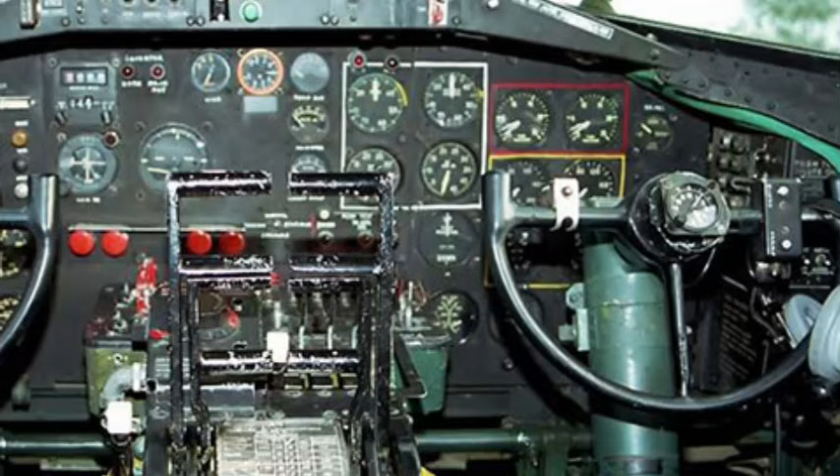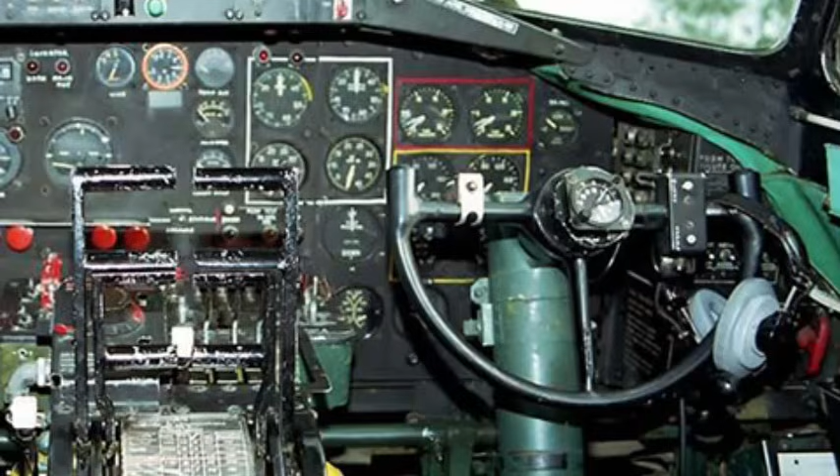Nobody who flew bombers in the 8th Air Force in 1944 thought about the bearings. They thought about flak. They thought about Focke-Wulfs. They thought about the cold and the fear and the fuel and whether the navigator had the wind right. They thought about 1,000 things, but never about the 4 small curved pieces of steel-backed silver alloy that were the only object standing between their aircraft and a runaway connecting rod explosively dismembering their engine in the thin air over Saxony. This is the story of why they didn't have to.

Every modern aircraft engine of the Second World War operated on a paradox that, when you look at it directly, seems impossible. Inside the engine, steel parts rotated against other steel parts at speeds that would normally generate enough friction to weld them together within seconds.

The pistons of a Pratt & Whitney R2800 double wasp moved up and down inside their cylinders 66 times per second at full power. Each piston was connected to the crankshaft by a connecting rod. The connecting rod transferred the explosive force of combustion, every combustion event peaking at roughly 1,200 pounds per square inch of cylinder pressure, into a rotational motion at the crankshaft journal.

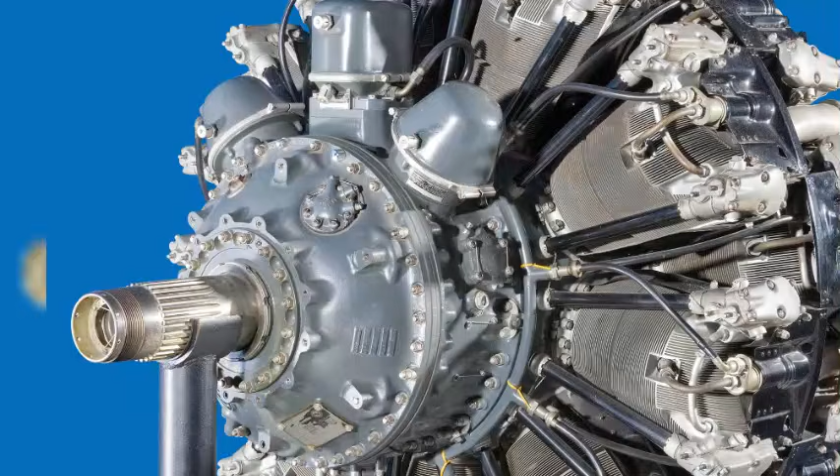At the moment of peak combustion, the load on the crankshaft journal exceeded 6 tons per square inch. The journal was rotating at 2,700 revolutions per minute. The bearing surface between the connecting rod and the crankshaft journal had a sliding velocity at full power of approximately 35 feet per second. Steel cannot slide against steel at 35 feet per second under 6 tons per square inch of load. It will not work. It cannot work. The metals will gall, weld, tear, and fail within a fraction of a second.

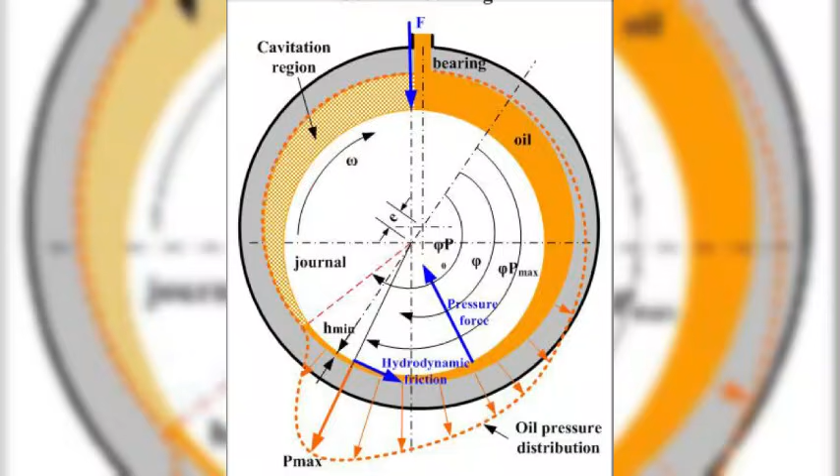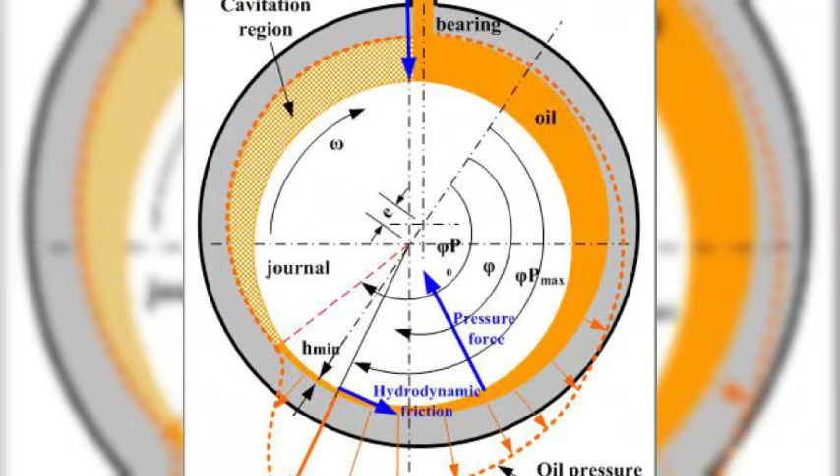The reason the engine ran instead of disintegrating was that the connecting rod was not, technically, touching the crankshaft. It was floating. Between the steel of the crankshaft journal and the steel of the connecting rod, there was a thin shell of softer metal, perhaps 15 thousandths of an inch thick, bonded to a steel backing strip and pressed into the cap of the rod.

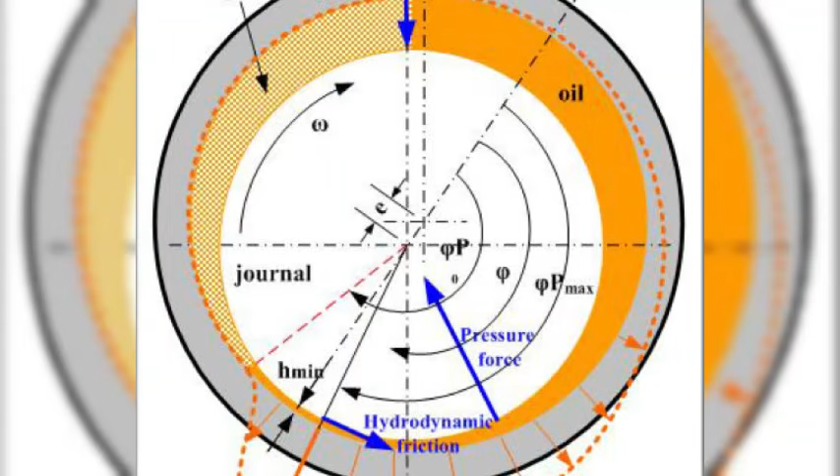Across the surface of that softer metal, oil under pressure from the engine's lubrication system formed a hydrodynamic film. The crankshaft journal rode on this film of oil. It never actually touched the bearing surface, except at the moment of starting, the moment of shutdown, and during brief excursions under extreme load when the oil film thinned.

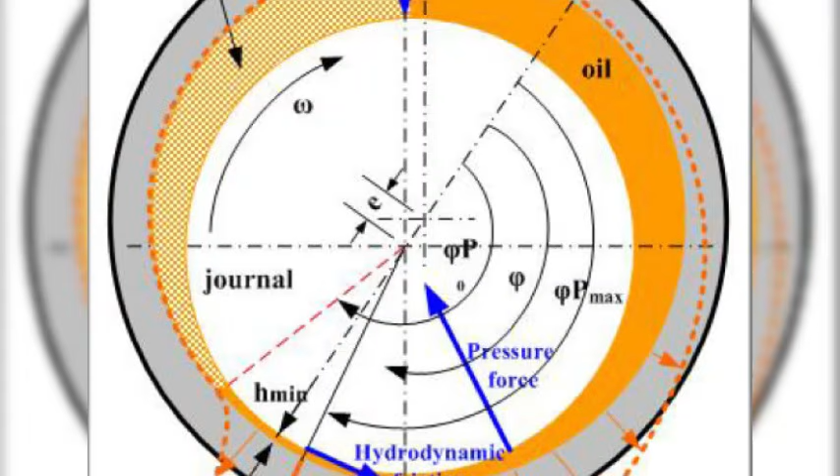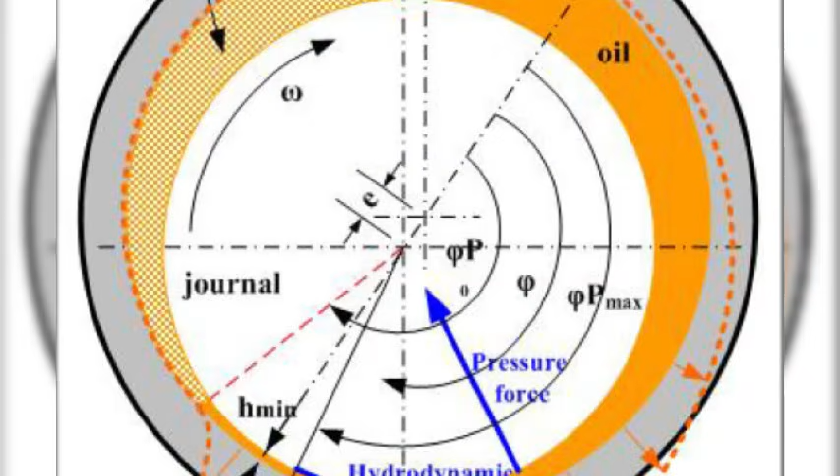The bearing's job was to survive those excursions without destroying itself, to absorb any small contaminant that found its way into the oil, to dissipate the heat generated by friction, and to maintain its dimensional accuracy to within a few 10,000ths of an inch for hundreds, then thousands of hours, across thermal cycles ranging from -50 in the upper atmosphere to over 400 degrees Fahrenheit inside the engine after a hard climb. It was the most demanding metallurgical assignment in the entire aircraft, and it was assigned to a piece of metal smaller than a man's palm.

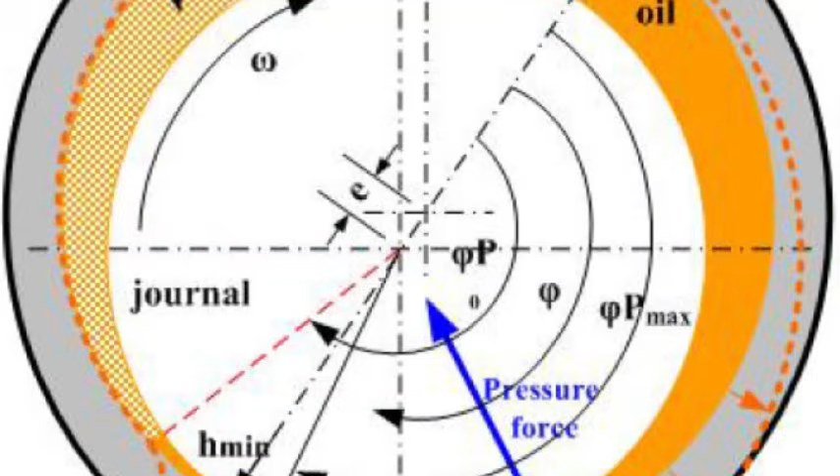The Norden bomb sight is famous. The Browning machine gun is famous. The Merlin engine is famous. The B-17 itself is famous, photographed and filmed and memorialized in concrete at airfields across the American Midwest. The men are famous, properly so, and their stories are told and retold every year on the anniversary of every raid. But the bearings are not famous.

There is no monument to them. There is no museum exhibit. They appear in no documentary. The companies that made them, Cleveland Graphite Bronze, Federal Mogul, and Johnson Bronze, are footnotes in industrial histories that themselves are rarely read.

And yet, without those small curved shells of bonded metal, not one of the famous things could have happened. Every Merlin in every Spitfire, every R-2800 in every Thunderbolt, every Allison in every P-38, every Cyclone in every B-17, every Twin Wasp in every Liberator, every R-3350 in every B-29 - none of them would have run for more than a few hours. The 8th Air Force would have stayed on the ground. Berlin would not have been bombed.

The story of how that did not happen, of how a small company on the east side of Cleveland, Ohio, managed to produce a bearing capable of surviving conditions that bearings had never been asked to survive before, and then to produce them in quantities no one in 1939 would have believed possible, is the story of one of the most consequential pieces of metallurgy in the 20th century.

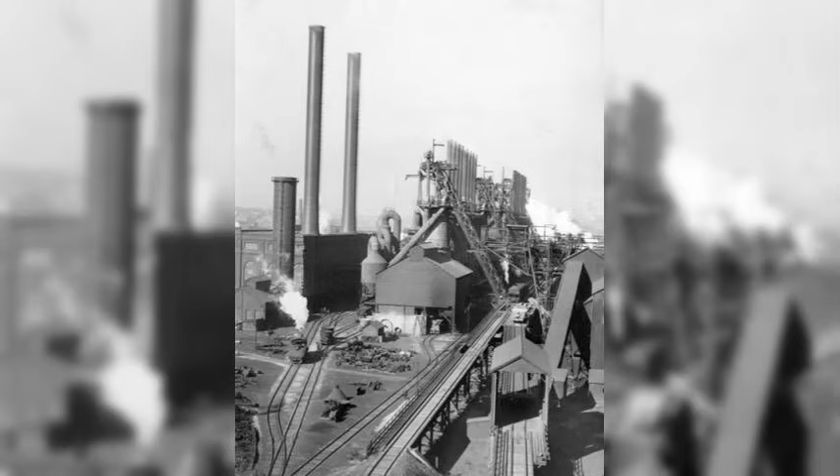It begins, like so many of these stories, with a name almost no one remembers. Ben Hopkins was the son of a Cleveland businessman with no particular distinction. In 1919, Hopkins took an idea, an interest, and 20 employees and rented space at 2906 Chester Avenue in Cleveland to start a company he called Cleveland Graphite Bronze.

The name described, at the time, a fairly mundane product. CGB made what were called self-lubricating bushings for the automotive industry. These were small cylindrical sleeves of cast bronze into the inside surface of which graphite had been baked or pressed under heat. The graphite served as a solid lubricant, which meant the bushing could rotate around a steel shaft for thousands of hours with minimal oil. They were used in places where adding an oil supply was inconvenient, in suspension parts, in steering linkages, in accessory drives. They were unglamorous, but they were essential, and Hopkins built a business making them.

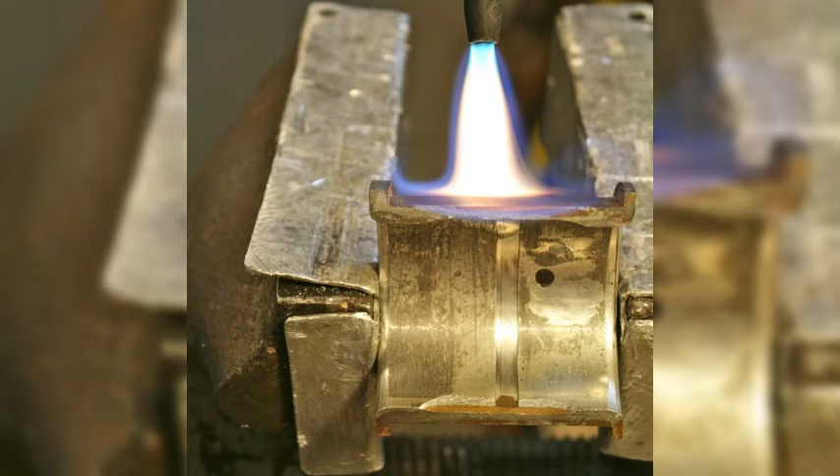What changed everything about Cleveland Graphite Bronze, and eventually about every aircraft engine flown by the Allied Air Forces in the Second World War, was something CGB engineers developed in 1930. It was called the thin-wall bearing.

Until 1930, the standard way to make an engine bearing was to pour molten Babbitt metal, a soft alloy of tin, antimony, and copper, invented by a man named Isaac Babbitt in Massachusetts in 1839, directly into a cast iron or bronze housing inside the engine. The Babbitt would solidify, and a machinist would then bore and scrape it by hand to fit the crankshaft journal.

The process was slow. It required skilled labor. The bearings were thick, sometimes 3/8 of an inch of Babbitt over a bronze backing, which meant they had significant thermal mass, slow heat dissipation, and limited fatigue strength. If the bearing failed, the entire engine had to be partially disassembled, the old Babbitt melted out, new Babbitt poured in, and the whole thing rebored.

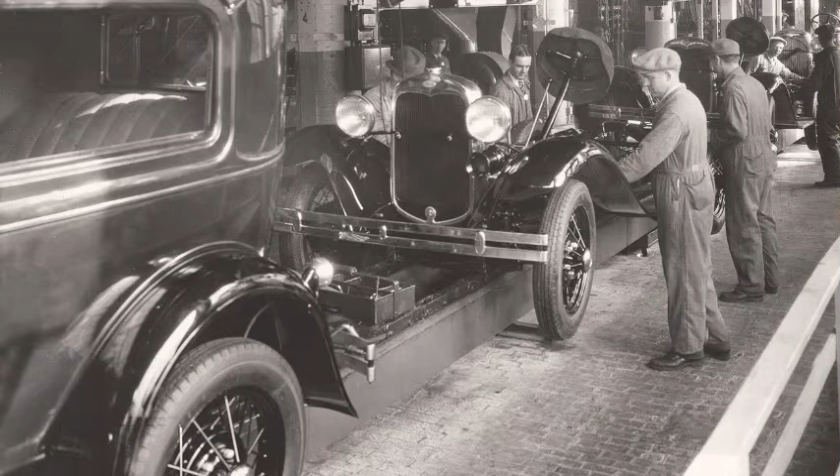For automobile manufacturers building tens of thousands of engines on assembly lines, this was an enormous bottleneck. For aircraft engines spinning faster and faster every year, it was rapidly becoming impossible. The bearings were the limiting factor. The thin-wall bearing did away with all of that.

The engineers at Cleveland Graphite Bronze took a strip of low-carbon steel, perhaps 50 thousandths of an inch thick. To one face of that steel strip, they metallurgically bonded a layer of copper-lead alloy, approximately 15 thousandths thick. The copper provided strength. The lead, dispersed in tiny droplets through the copper matrix, provided the soft running surface against which the crankshaft journal would slide.

They then rolled the bimetallic strip around a forming die, producing two semicircular shells that snapped together inside the connecting rod cap or the main bearing saddle. The shells were precision finished at the factory to within 10 thousandths of an inch of nominal. They required no scraping, no hand fitting, no boring.

An assembly line worker could pull a pair of shells from a box, lay them into the bearing housing, torque the cap to specification, and have a finished precision bearing in less than a minute. If a bearing failed in service, a mechanic could remove the cap, lift out the worn shells, drop in new ones, and have the engine running again in an hour.

The thin section meant the bearing dissipated heat almost 10 times faster than the old cast Babbitt designs. The steel backing gave it fatigue strength the old bearings could only dream of, and the cost in skilled labor per engine dropped by an order of magnitude.

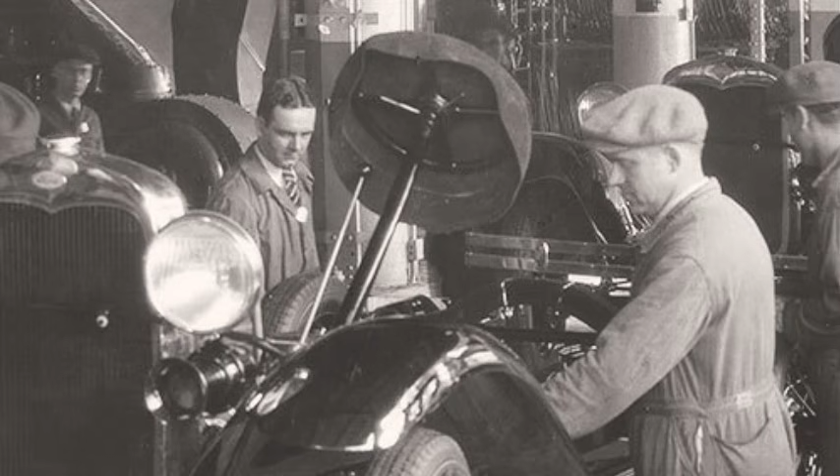In 1930, the year the thinwall went into production, Cleveland Graphite Bronze had a few hundred employees. By 1937, the company was making 183 million bearings per year, and its workforce had grown to 2,300 people. The thinwall had become the standard bearing in every Detroit automobile, in Caterpillar tractors, in Cummins diesel trucks, in Allis Chalmers combines. American industry, the most rapidly mechanizing economy on Earth, ran on Cleveland Graphite Bronze's bearings, and most of the people whose lives depended on those bearings every day they drove to work had never heard of the company.

Around this time, an Englishman walked into the lobby of CGB's headquarters on East 72nd Street in Cleveland and sat down on a sofa. His name was Guy Anthony Vandervell, son of Charles Vandervell, founder of an English electrical components company called CAV. Tony, as he was called, had been a motorcycle racer at the Isle of Man, a car racer at Brooklands, and was now running a small bearing subcontractor called O&S Oilless Bearing Company that supplied parts to his father's electrical business.

He had heard, somewhere, perhaps from an American engineer named Delmar Roos who worked at Studebaker, that there was an American company in Cleveland making a revolutionary new bearing. Vandervell had crossed the Atlantic by steamer specifically to acquire the European manufacturing license.

The story, told by his biographers, is that he sat on that sofa in the CGB lobby for 6 days. He did not have an appointment. He did not have an introduction. He simply sat and waited and made it clear he was not leaving until someone with authority spoke to him. Eventually, someone did. He left Cleveland with a licensing agreement that allowed him to manufacture thinwall bearings in the United Kingdom, and he went home and founded a company called Vandervell Products in Acton, West London.

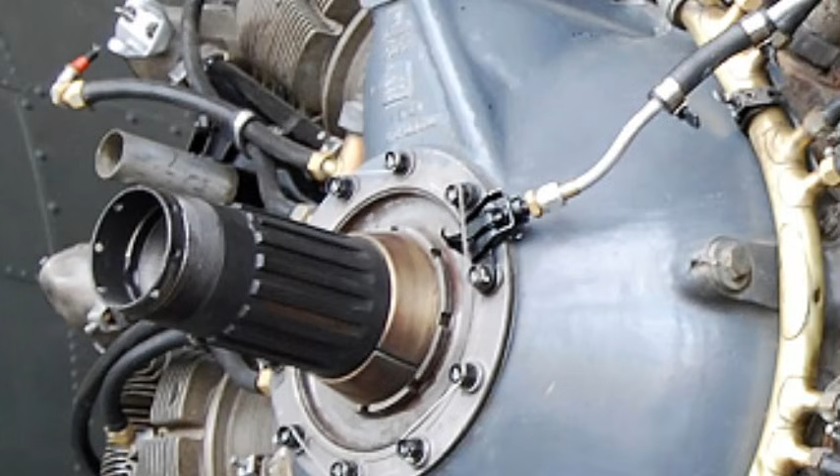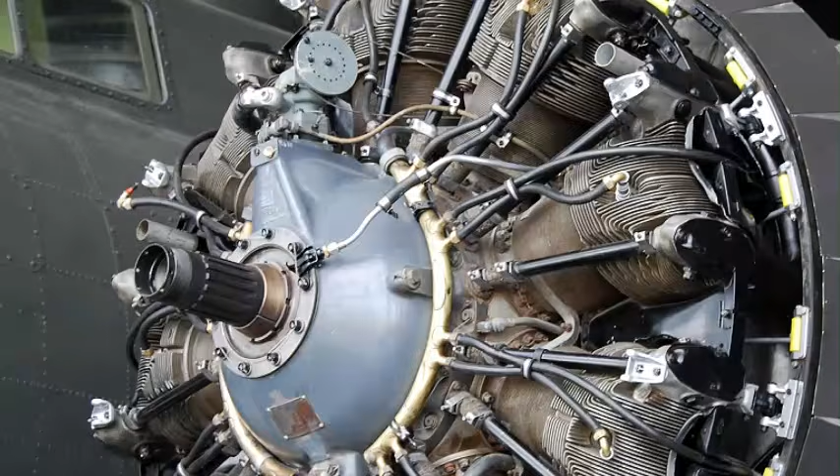They were achieved by running the engines at compression ratios as high as 7:1 on 130-octane aviation gasoline at manifold pressures above 45 inches of mercury, with cylinder pressures peaking around 1,200 psi. The connecting rod loads in a Double Wasp at full power were almost 3 times higher than the loads in any contemporary truck engine, and the rod was being swung through that load 33 times per second, every second, for hours on end while the engine was being bounced and pitched and yawed and shot at.

The copper-lead thinwall, designed for automobiles, could not handle it. Engineers at Cleveland Graphite Bronze had known this would be a problem since the late 1930s, when conversations with Pratt & Whitney and Wright Aeronautical revealed how aggressive the next generation of aircraft engines were going to be. CGB had a research division by then, and it began a development program, quietly, 2 years before Pearl Harbor, to design a bearing material that could survive the new engines.

The solution they arrived at was, on paper, ridiculous. They proposed plating the working surface of the bearing not with lead, not with tin, not with babbitt, but with silver. Pure silver electroplated onto a steel backing strip in a layer perhaps 12/1000ths of an inch thick.

Over the silver, they would then plate a thin overlay of lead-tin or lead-indium, just 1 or 2 thousandths thick, to give the bearing the soft running-in surface it needed. The silver provided the load capacity and heat conduction. The overlay provided the embeddability, the ability to absorb a small particle of carbon or wear debris without scoring the crankshaft. Together, the composite could handle pressures that pure copper-lead could not even approach.

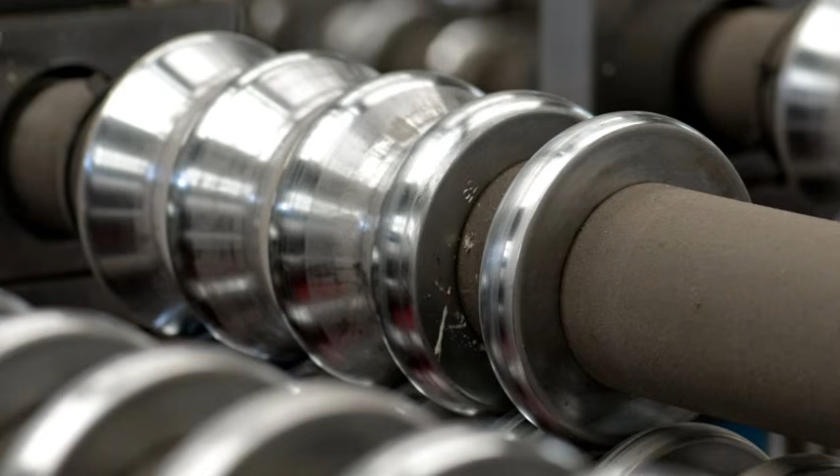Silver was, of course, expensive. It was also strategically controlled. The United States Mint held enormous reserves of it. The fact that the bearing required only 12 thousandths of an inch on a strip of steel meant that, by weight, the silver consumption per bearing was actually quite small. By the standards of conventional silver applications—photographic film, electrical contacts, tableware—the bearing program was a modest user.

The Manhattan Project would eventually borrow 14,000 tons of silver from the West Point Bullion Depository to wind the electromagnetic coils of its uranium enrichment calutrons, an episode that has rightly become famous. The silver-bearing program, far smaller and started years earlier, has not.

But by the standards of the metallurgical knowledge of 1939, plating silver onto steel and bonding it well enough to survive the connecting rod cap of a high-output radial engine was a problem of breathtaking difficulty. Silver does not naturally adhere to steel. The thermal expansion coefficients are different. Cyclical loading at high temperatures tends to make silver-on-steel interfaces delaminate.

CGB engineers spent 2 years working through the chemistry. They developed a multi-step plating process that began with a strike layer of copper, perhaps 100 millionths of an inch thick, followed by the silver, followed by another flash of copper as a diffusion barrier, followed by the lead-indium overlay. The whole stack-up had to be deposited evenly, without porosity, without inclusions, and bonded so well that nothing short of catastrophic engine failure could separate the layers.

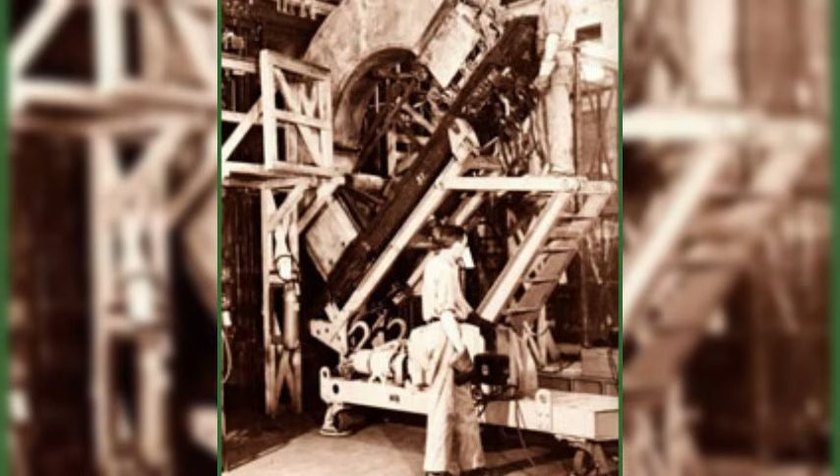By the spring of 1941, when the United States was not yet at war but was clearly building toward it, Cleveland Graphite Bronze had a silver overlay aircraft bearing in production. Pratt & Whitney specified it for the master rod of the R2800. The master rod in a radial engine is the single connecting rod that bolts directly to the crankshaft, with all the other rods in that bank of cylinders attached to it through articulated knuckle pins.

The master rod bearing is the single most heavily loaded component in the entire engine. It is the choke point. If it fails, the engine instantly stops, then disassembles itself violently. Pratt & Whitney's decision to base the R2800 master rod bearing on the CGB silver overlay design was an act of faith in a company that had never before built an aircraft component for a wartime production program.

By 1944, that bearing was inside every P-47 Thunderbolt, every F4U Corsair, every F6F Hellcat, every B-26 Marauder, every A-26 Invader, every C-46 Commando, and every other airframe powered by the Double Wasp. Pratt & Whitney built over 125,000 R2800 engines during the war. Every one of them had a silver overlay master rod bearing, and the overwhelming majority of those bearings, or their licensed equivalents made by Federal Mogul and Johnson Bronze under wartime cross-licensing agreements, traced back through metallurgical pedigree to the development work done by a handful of engineers in a brick building on East 72nd Street in Cleveland.

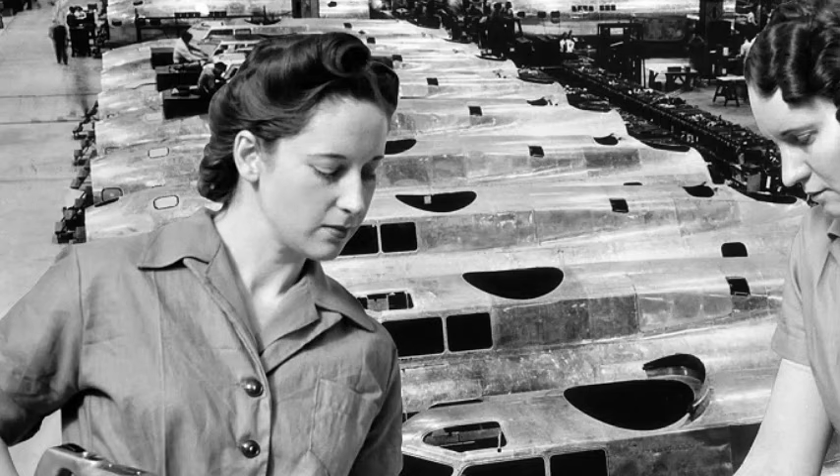The scale-up was the second miracle. In 1939, Cleveland Graphite Bronze employed about 2,300 people. By 1945, it employed over 7,000. Three production shifts ran around the clock, 7 days a week, in a plant complex that had expanded onto a new site at 17,000 St. Clair Avenue, with a building so large that the company sometimes had trouble finding workers fast enough to fill it.

The bearings poured out by the millions. By the middle of 1944, CGB alone was producing somewhere over 200 million bearings per year, of which a steadily growing fraction were aircraft grade. The Federal Mogul Corporation in Detroit, which had its own bearing technology based on a copper-lead alloy called C50 developed in their research labs in 1934, expanded similarly. So did Johnson Bronze in New Castle, Pennsylvania. Together, the 3 companies became the structural foundation of every Allied aircraft engine program.

The work was difficult, and the workers were not necessarily prepared for it. The vast majority of pre-war bearing manufacturing employees had been men, often skilled tradesmen with years of experience. By 1942, those men were largely in uniform. CGB and Federal Mogul, like every other defense contractor, replaced them with women. Whole new training programs had to be invented. Standards had to be enforced through inspection rather than craft tradition.

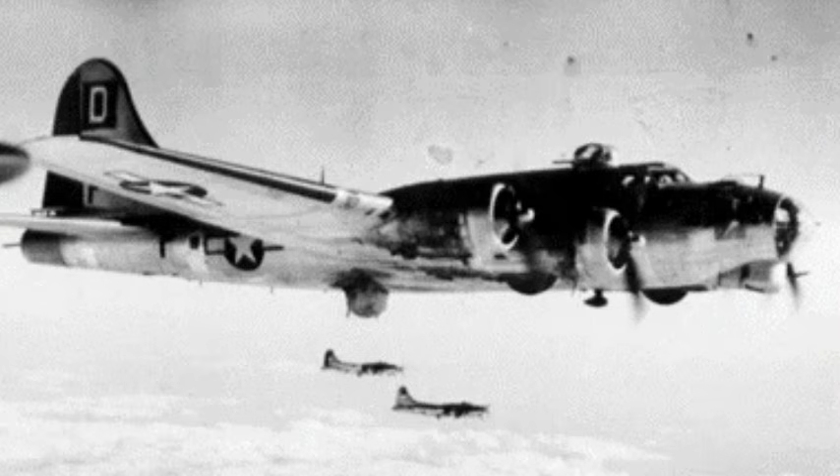What the bearing did in the engine deserves to be understood in detail, because the magic was not in any one thing, it was in the integration of many things.

When a B-17 took off from a base in England on a winter morning in 1944 with four R-1820 Cyclones at maximum continuous power and a full bomb load straining the wing spars, the bearings in those four engines began their working day having sat all night at temperatures around 0 degrees Fahrenheit.

The oil in the sumps was viscous and slow. For the first 30 seconds of operation, before the oil pressure built and the bearings developed full hydrodynamic film, the silver overlay was the only thing standing between the crankshaft and catastrophic galling. The soft lead-indium top layer absorbed the rubbing.

As the engine warmed, the oil thinned, the pressure climbed, and the hydrodynamic film established itself. By the time the bomber lifted off, the bearings were running on oil, not on metal-to-metal contact, and the silver underneath was carrying the load it had been designed to carry.

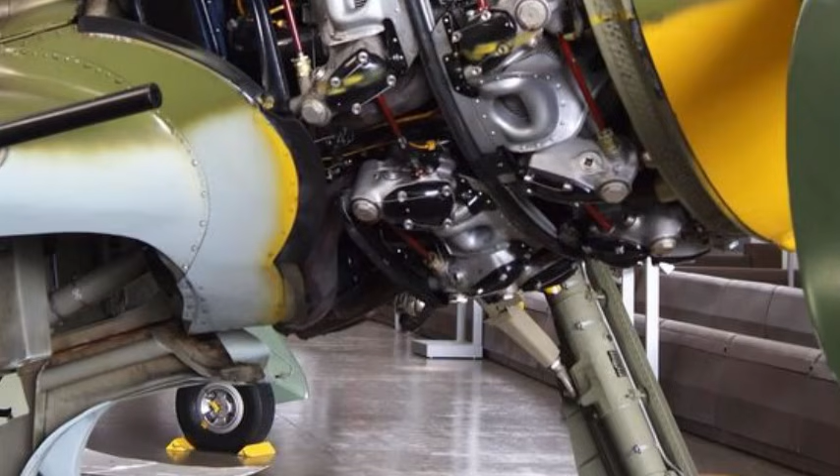The Germans, by contrast, had a problem they could not solve. German aircraft engines, particularly the Daimler-Benz DB605 in the Messerschmitt Bf 109 and the BMW 801 in the Focke-Wulf 190, were excellent designs in many respects. The BMW 801 was a 14-cylinder radial of 41.8 liters displacement, capable of 1,700 horsepower, fitted with a fully automatic engine management system years ahead of its Allied contemporaries. The DB605 was a beautifully made inverted V12 with direct fuel injection that allowed the aircraft to perform negative G maneuvers that early Merlins could not match.

These were technically sophisticated engines, but their bearings were not made of silver. German bearing manufacturers, primarily firms in southwest Germany and Austria, continued through the war to rely on lead-bronze and copper-lead designs descended from interwar automotive practice. They were good bearings by the standards of 1938. They were not good bearings by the standards of 1944.

As German engines were progressively uprated to extract more power from the same displacement in response to Allied numerical superiority in the air, the bearings began to limit them. Time between overhauls on Luftwaffe engines, which had been 300 hours in 1940, fell to 100 hours by 1944. Some operational reports mention squadron averages of 50 hours between overhauls.

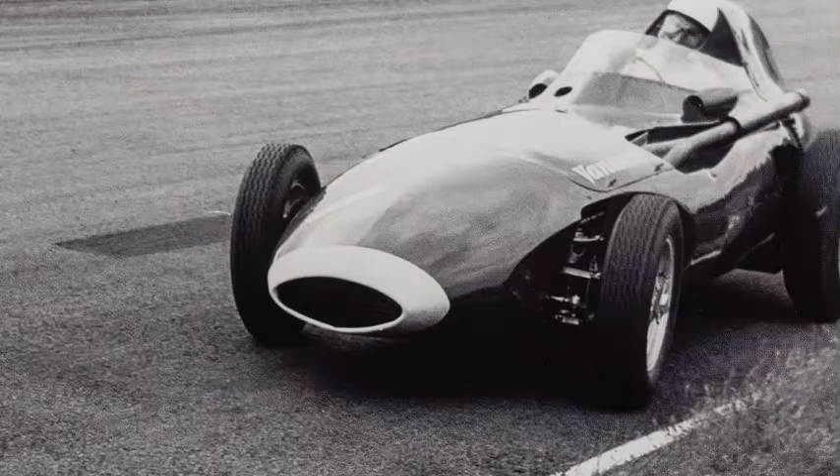Tony Vandervell, the Englishman who had refused to leave the lobby in Cleveland in 1931, used the fortune he made from licensed bearing production during the war to go racing. In 1958, his small team won the inaugural Formula One Constructors' Championship with a British-built car powered by a four-cylinder engine that was, in essence, a rebadged Rolls-Royce military engine fitted with Vandervell thin-wall bearings. The team was called Vanwall, a name Vandervell had built by fusing his own name with the trademark of the product that had made him rich.

He died in 1967, his racing team disbanded, his bearing company on the verge of being absorbed by a larger British conglomerate. He left behind a few photographs of himself in racing overalls, a few trophies, and the silent legacy of having brought to Britain the technology that had kept the Merlins running over the Channel in 1940.

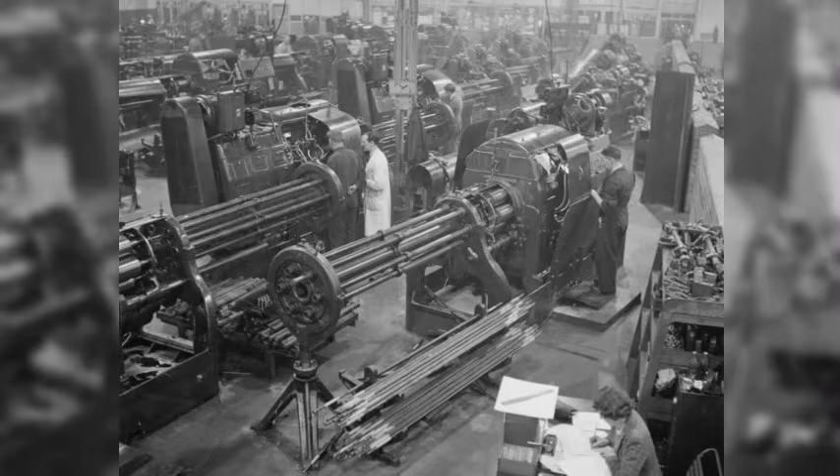W.A. Robotham, the Rolls-Royce chief engineer, wrote in his 1970 memoir, Silver Ghosts and Silver Dawn, that the licensing of the Cleveland Graphite Bronze thin-wall bearing was, in his assessment, the single most important piece of metallurgical assistance the British engine industry received from the United States during the entire interwar and wartime period. He noted that Vandervell, whom he had personally found extraordinarily difficult to deal with throughout his career, had performed a service the importance of which historians would probably never fully recognize.

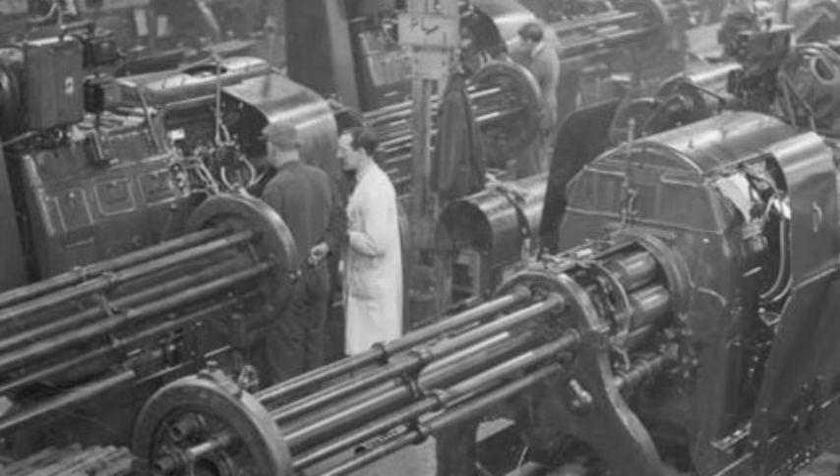He was correct on that last point. Historians have not recognized it.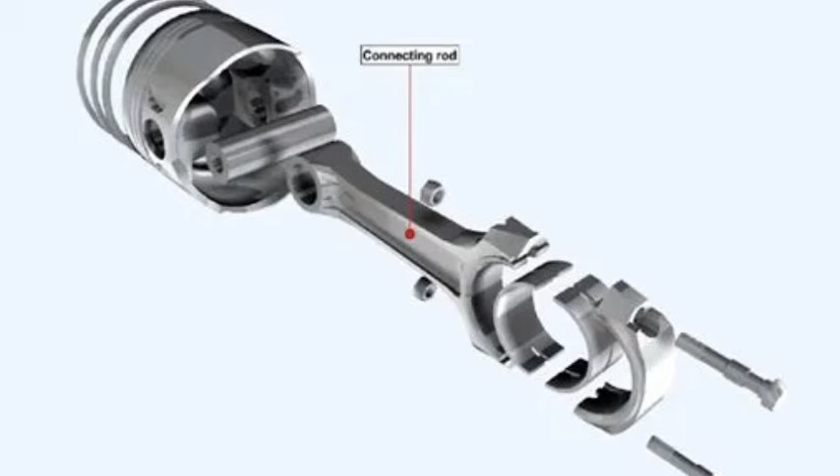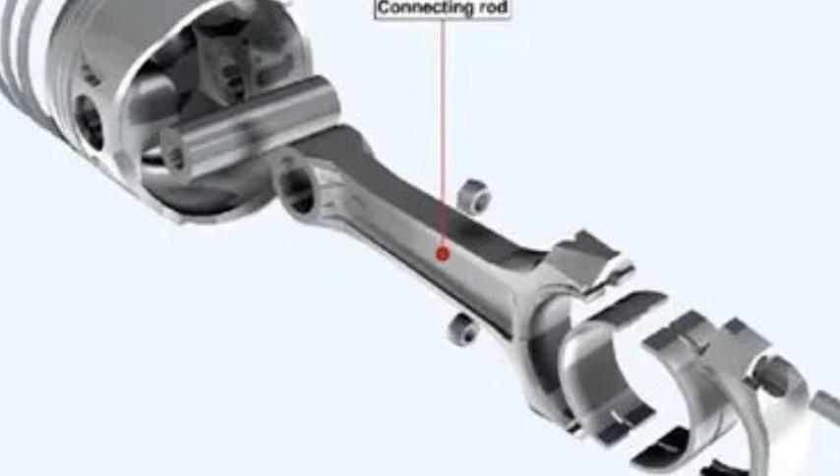The bearing, the small, curved shell of steel backed with copper and silver and indium and lead sitting in the cap of a connecting rod inside an engine, inside a nacelle, inside a wing on an airplane flying over Germany, never asked for recognition. It did its work, which was to hold a steel shaft 6/1000ths of an inch away from another steel shaft, while one of them rotated at 2,700 revolutions per minute under tons of cyclical load for hundreds of hours in temperatures from -50 to 450 Fahrenheit without failing. That was the assignment. It performed the assignment.

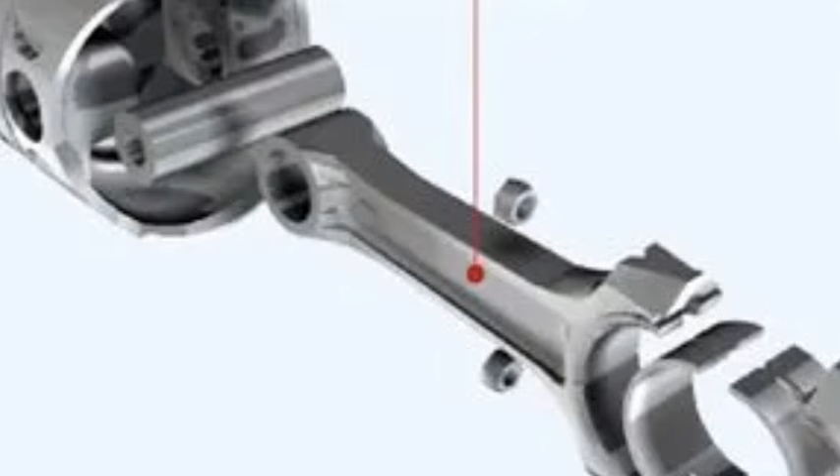The men who designed the bearing knew what they had built. The men who flew behind it did not. The historians who wrote about the war later did not. And so the story of the bearing has remained quiet, while louder stories about Spitfires and Mustangs and Flying Fortresses have filled the books and the films and the public imagination.

But every Merlin had 8 of them on the crankshaft and 12 more on the connecting rods. Every R-2800 had 22 of them per master rod assembly. Every R-3350 had more than 30. Multiply by the number of engines built, multiply again by the number of missions flown. The bearings of the Allied air forces in the Second World War numbered in the hundreds of millions.

They were made by women and men working 3 shifts in factories in Cleveland and Detroit and Newcastle and Acton, who did not know what aircraft their bearings would end up in, who did not know what cities those aircraft would bomb, who did not know what young men would fly those aircraft home or not home. They knew only that the bearing in front of them needed to be within 10/1000ths of an inch of nominal, with 12/1000ths of silver bonded smoothly to the backing strip, with no porosity in the plating, no inclusions, no delamination at the corners. They built the bearings to specification. The bearings did their work. The engines ran. The war ended.

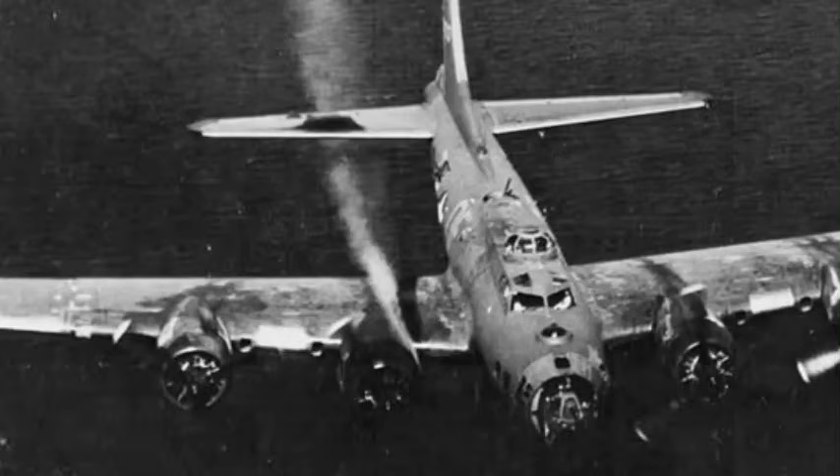And somewhere over Oschersleben in January of 1944, 4 R-1820 Cyclones in a B-17 named Belle of the Brawl carried 10 young men through a sky filled with flak and fighters and brought them home on bearings made by a company in Cleveland that no one in the airplane had ever heard of. That was enough. In a war decided by what worked, it was more than enough.